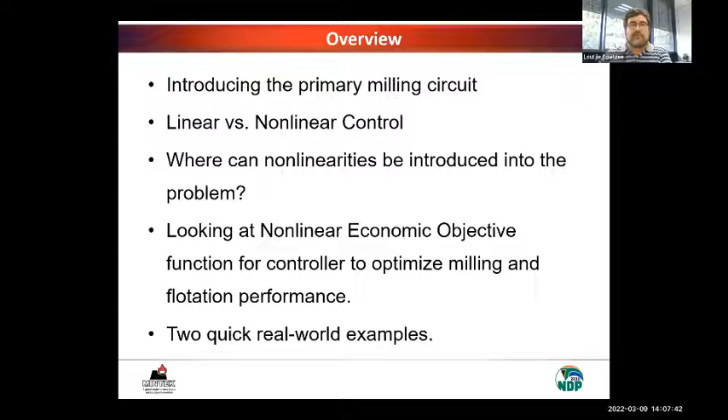Okay, so for this talk, I'm going to be focusing on a primary milling circuit. This is a typical circuit in PGMs, in this case a Merensky ore that's being processed by a primary mill that uses hydrocyclones as its classification. It then goes into a surge tank or a conditioning tank before it feeds into the flotation circuit. So for this case study, or for this example, I'm going to be looking at what can we do with this specific milling circuit in order to improve the feed to the flotation, having therefore better flotation performance.

So just quickly, I'm going to run through the circuit. So we assume we have a silo with 2 feeders that feed into a conveyor belt, a weightometer that measures the feed rate into the mill. On the mill, we have the mass or the load, and we have the power as a measurement. It discharges into a discharge sump. We can add some water. We measure the level. We have the pump, and we can actually measure the density, the flow rate, and the pressure going to the hydrocyclones. In this case, I'm also assuming the hydrocyclones is a cluster of 8 cyclones, which can be switched online. The underflow goes back into the mill, overflow goes to the conditioning tank.

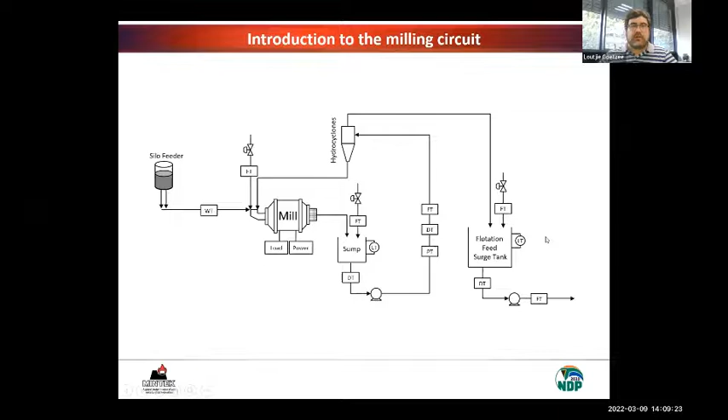When we talk about models, typically in the model predictive case, we usually refer to dynamic semi-empirical models or even purely empirical models. So what that means is that we will do perturbations, make changes to the plant, step a valve, step a pump, step the feed rate, and see how the process responds. Then we will fit some sort of mathematical representation or model to capture those dynamics.

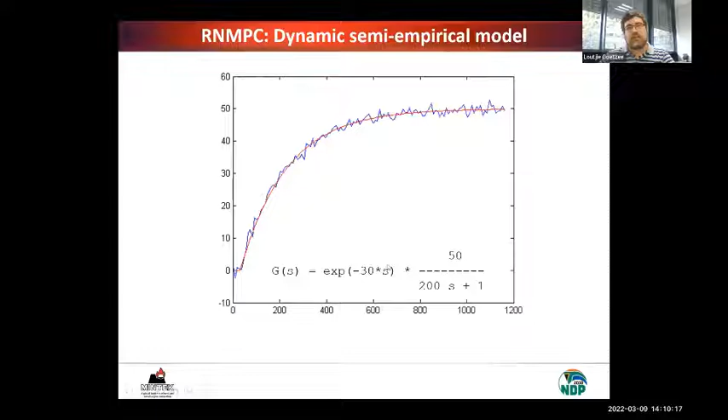So in this case, once we made a step change, we can see that the control variable has increased and then settles out at some steady state value. There's some dead time at the beginning, and there's some transition time or dynamics happening here. We can represent it in this format as a semi-empirical model.

So we can do this modeling either by hand, or we can use some automated tools. If the problem gets bigger, it becomes more efficient to use automated tools that then does the perturbation for you, so you don't need to pay an engineer to sit at the plant and step up, step down, and look at all the variables. The automated system can do that, giving you results in a short amount of time and also with less cost.

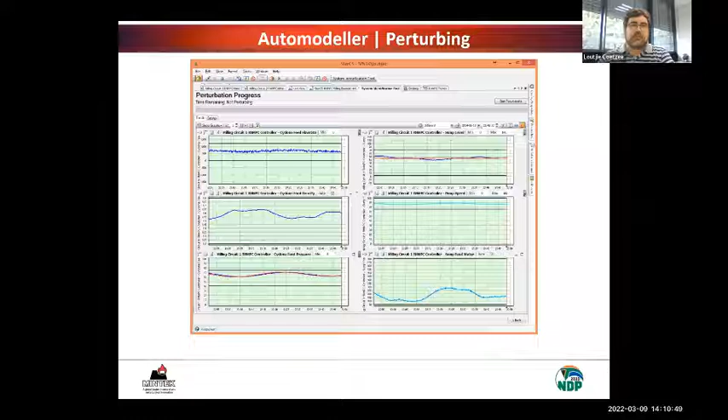Once you get this data, we can look at it in the frequency domain and see what variables responded. In this case, we perturbed the sump level set point. We can see that the sump level actually responded as we would have expected. We can see that the cyclone feed density actually responded, but there was no response on the rougher density, surge tank level.

The power draw of the mill, again, as we would have expected. We can see nothing on the solids feed rate. We can see the water addition changed. Discharge pump didn't change, rougher feed flow rate didn't change. Also the water addition to the surge tank didn't change.

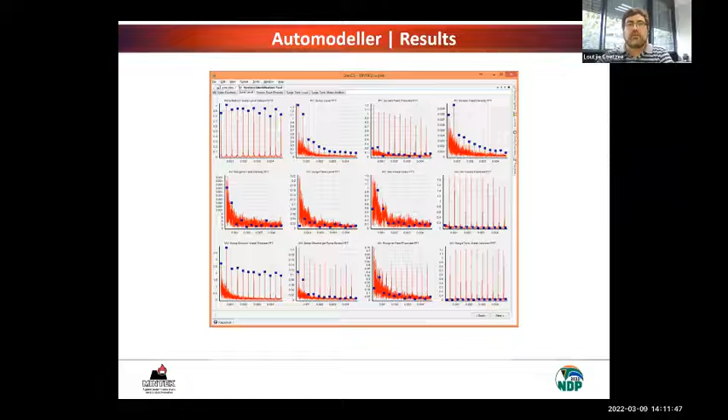So we can get a lot of information about how the process responds to certain perturbations that are made, and we can draw some conclusions about what variables interact with each other and what variables are independent of each other.

And when we're done with this exercise, we will get to a matrix of models that will say, okay, if we change the solids feed into the mill, the volume of the mill will change with this dynamic. We'll get the mill discharge, or the cyclone feed density will change using this dynamic.

Similarly, if we look at the water addition, the sump level will change. We will get, again, the density changing with this dynamic, and we'll even see the rougher feed density changing with this dynamic.

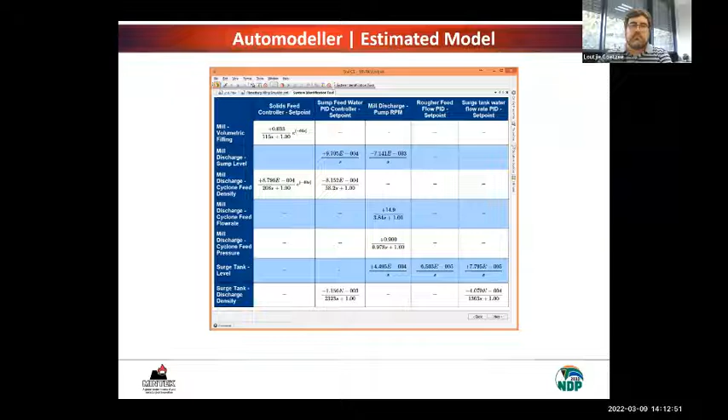And so we can go through all the manipulated variables versus controlled variables and see what is the interaction between them, what is the correspondence, and how the dynamics look. We will use our process knowledge in this case to evaluate: does this make sense, is the direction correct, is the model structure correct, is the type of dynamics what we expect.

Once we have that, we can then configure our model predictive controller to do regulatory control. Basically, what we mean by that is we control to some predefined set points, operating points that the operators want us to control. In this case, I'm just going to run this video.

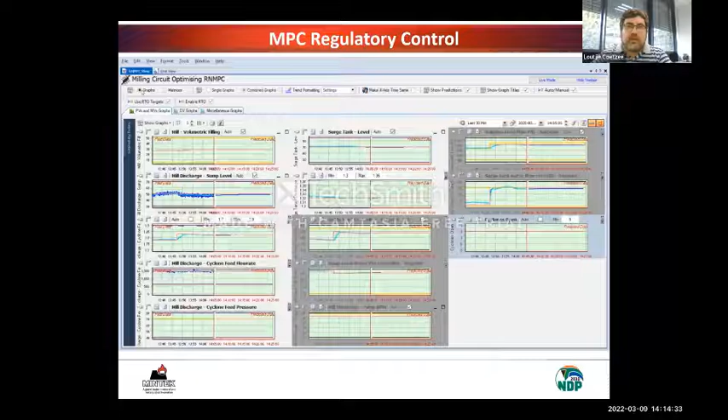In this case, we might want to just change the density on the cyclone side, but it's not just the density that's changing when we change the water, the volume is also changing. So what we've done is we've changed the density target for the flotation from 1.32 to 1.35. It's saying, okay, I need to reduce water, but as I reduce water, the volume needs to drop. And because the volume is dropping, the pressure also wants to drop, but we actually want to keep the pressure up for good classification. So it's actually closing a cyclone in the process in order to keep the pressure close to its upper limit.

And all of these changes, we can see almost all the manipulated variables are changing at the same time. It is doing that so that it can reject the effect on sump level, so there's minimal effect on sump level. It's trying to minimize the impact on flow to the roughers.

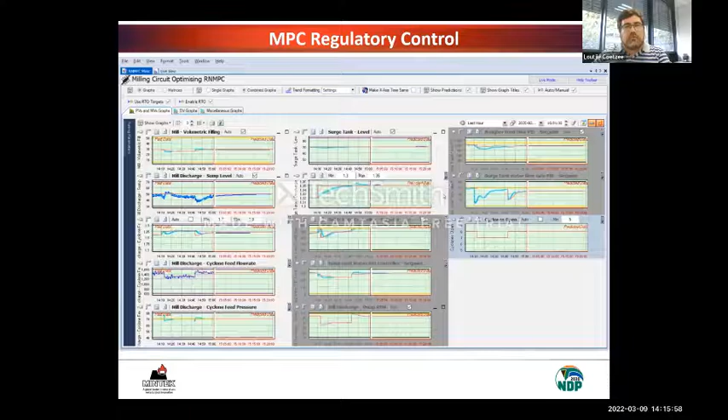And in this case, there's actually some optimization in there as well. It's trying to say, okay, while keeping this density at target, can I maximize the tonnage through the mill so that I can get some optimum economic performance?

So I'll start speaking about optimization now, but I hope that this demonstration gives you an idea of the regulatory control, multivariable regulatory control capability that MPC brings. So there's a few benefits. It can deal with the interactions.

As I said, if we change water for density, there's also a volumetric effect. If I change the feed rate to the mill, there's density and volume effects downstream that needs to be handled.

Also, it's one of the few control strategies that can actually deal with constraints on the control variables. So if I know that I have a volume limit downstream, because my flotation can only handle a certain volume due to residence time reasons, then it can back calculate from that constraint all the way to what is the optimum feed rate that will not exceed that constraint. So that is the benefit.

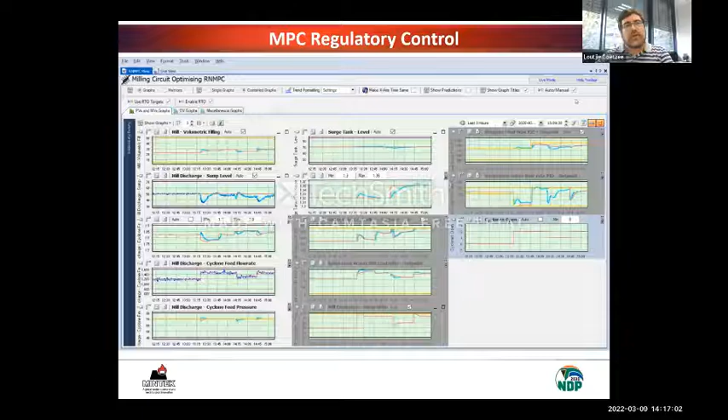So it can handle these interactions, it can handle constraints. It is predictive, so it knows any change that is going to make the process, how is that going to affect the process. Okay, so let's move on.

So as I said, we get these models, and in our case, the models are translated into ordinary differential equations, because it also has to make provision for nonlinearity or nonlinear models to be represented.

And we use state space representation. So we have the states, and the states can be real or it can be just a mathematical construct. So if it's real, it might be something like the sump level that's being represented by a state. And the state is where the dynamics are happening.

So we can say the sump level is increasing. The rate of increase in the sump level is being described by the mathematics on the right-hand side of the equation that will say, okay, this is how the rate of change will happen because of the pump speed, because of the water addition into the sump. And then the controller will know, okay, if I balance the pump speed, the flow out of the sump versus the flow into the sump, then I will get to a steady state sump level as an example.

So it looks at this whole model, it derives all of its interactions for different variables from this and uses it in its prediction in order to calculate the optimum control moves it needs to implement on the plant.

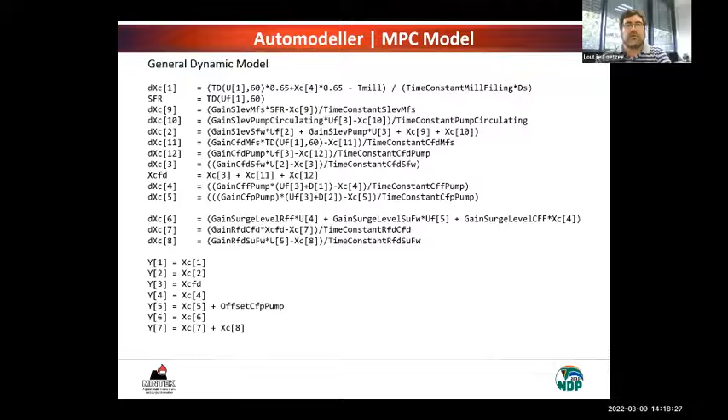Okay, so linear control, this is actually more a statement, is suitable for most control problems. And the reason is that we typically operate around a fixed operating point. And if you look at that behavior, if I'm operating around a fixed operating point or in a small operating region, then the models can typically be linearized and still give a very good approximation of the dynamics of the behavior of the plant.

Non-linear control is more common in batch processes because there we start at one operating point and we want to move the process to a completely different point, and it might go through different behaviors as we move the process from one state to another. But also we can see that non-linear control can start to have an impact when we're doing optimization.

So in this case, we say we can add nonlinearities, and that can be due to having phenomenological models or first principle model components in our models that can describe the changes in steady state as we move from one operating point to another more accurately, with just some parameters that needs to be fitted to a specific plant.

So we will only add it where it makes sense, and I will give some examples of where it might make sense in the milling context. It is useful for lights out control and whole process optimization, propagating backwards where the process has to operate over a large operating range. So what I'm describing here is Industry 4.0.

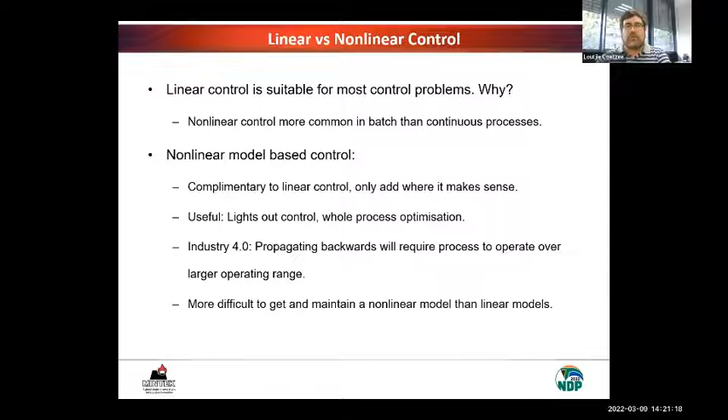But it is a lot more difficult to get and to maintain nonlinear models than linear ones. So in most practical cases, even in our case, we use linear control for regulatory control. And we're only really investigating nonlinear approaches for optimization where it makes sense.

So if we go back to our milling circuit, where are the typical nonlinearities that are present? The first one is the mill. The mill has some nonlinear steady state behavior depending on the volumetric filling. So if I fill up the mill, if it's on the underloaded side, it will behave in a certain way. If it's on the overloaded side, it will behave differently in steady state. And I'll explain that a bit more.

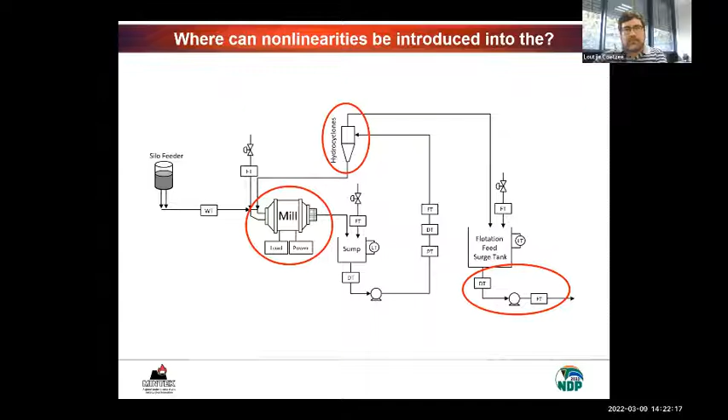The hydrocyclones are also a point of, especially if it's a cluster, nonlinearities, specifically discontinuities that are present in the model. And then if we're looking at the interface between milling and flotation, if we want to reduce the flotation problem down to a simple metric, that is also quite a nonlinear process in itself. I'll explain each of these three points in the next few slides.

So if we just look at the volumetric filling, or as a proxy, the mass of the mill compared to the throughput, there's a well-known throughput curve that we can get. Here's an example of how we can linearize it. So if we limit the application of the model between 15 and 30% volumetric filling, we can easily approximate this parabola as a linear line, so basically a linear model with a fixed gain.

If we want to widen the limits, however, we start to get changing behavior, where on this side, if I increase the volumetric filling, the throughput goes up. If I'm in the middle, there's almost no change. And if I go to the overloaded side, if I increase the volumetric filling, the throughput actually goes down. So if I'm still applying a linear model on this side that says increasing volumetric filling will increase the feed rate, and the feed rate starts to drop off, it will say, oh, okay, I must just push up the volumetric filling some more, worsening the problem because it's not aware that there's a change in the steady state behavior happening here.

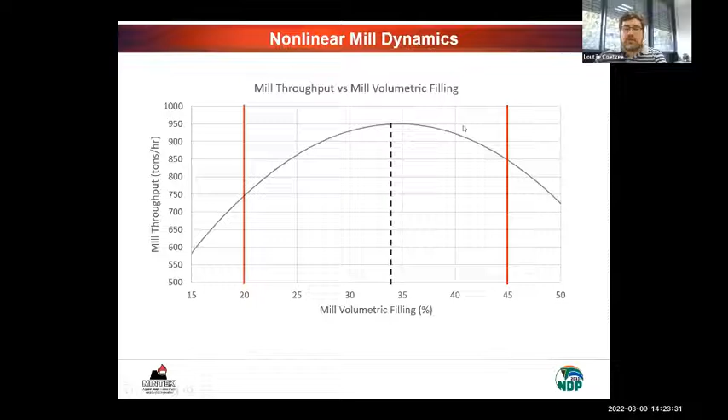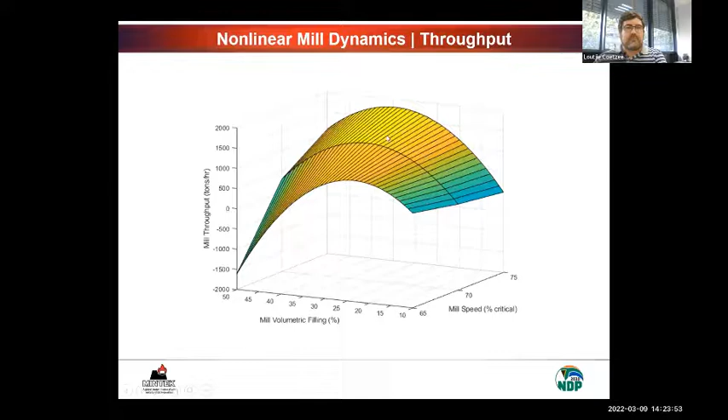There's even more when we look at densities or rheology, if we look at ball loading, that starts to play a role in terms of the mill behavior. And also, if we look at the speed, it's the impact position of the toe that can also play a role. So if you're undershooting or overshooting that toe position, it can have a drastic change in behavior, increased liner wear, increased ball wear, but also reduction in throughput. So there's a lot of factors that can just be described around the mill alone in terms of steady state behavior.

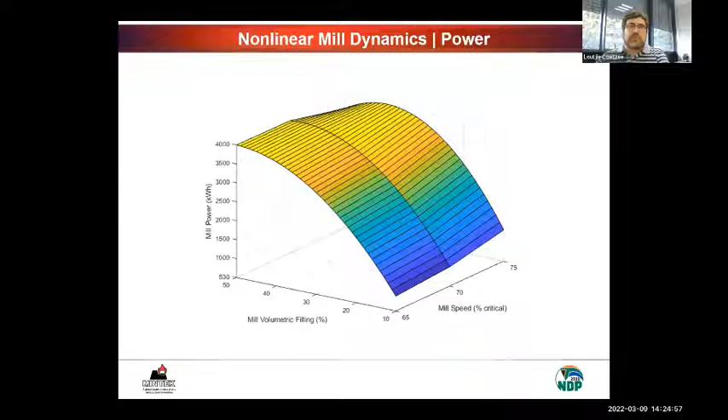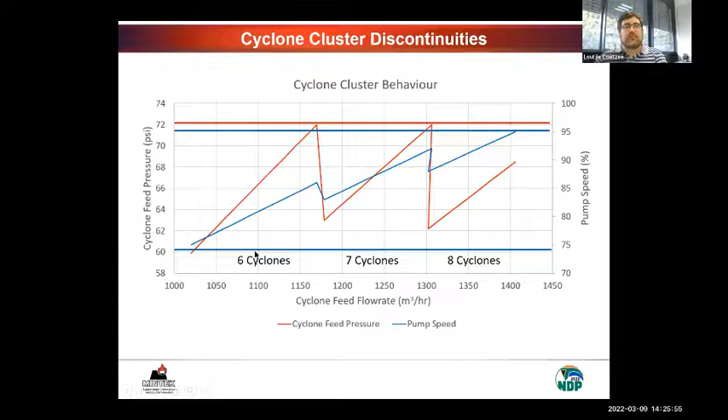So these discontinuities are also a form of nonlinear behavior. And what's also present in this case is discrete numbers - we can't have 6.2 cyclones or 6.3 cyclones open. So we can't do continuous control, it's either 6 or 7 as a discrete number.

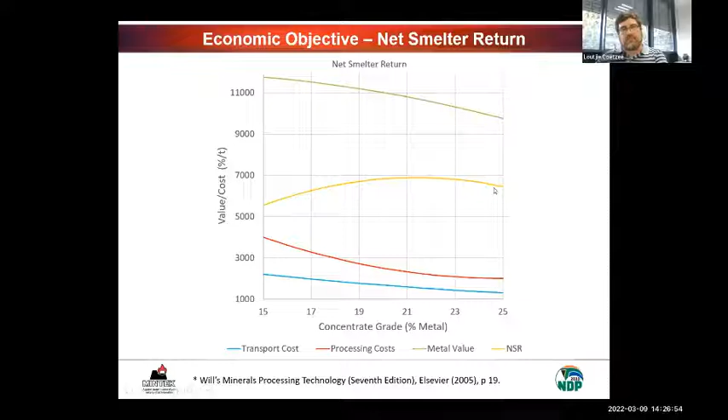Then if we start looking at the net smelter return, we can look at the transport cost for transporting the concentrate grade to the smelters. We have the processing cost - how much it costs to get a certain concentrate grade of metal. So we can look at what is the metal value - as the grade goes up, the metal value goes down because we have less recovery. If we combine these three curves together, we get the net smelter return, and we can see there's some optimum concentrate grade that gives the best value per cost in terms of metal. That is our ultimate economic objective for a concentrator - milling and flotation - to optimize this net smelter value.

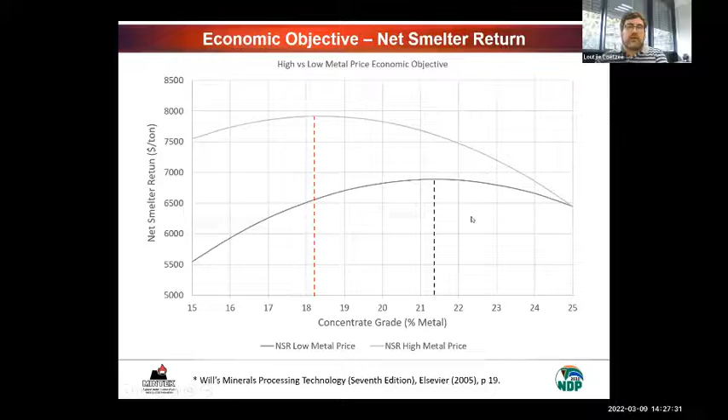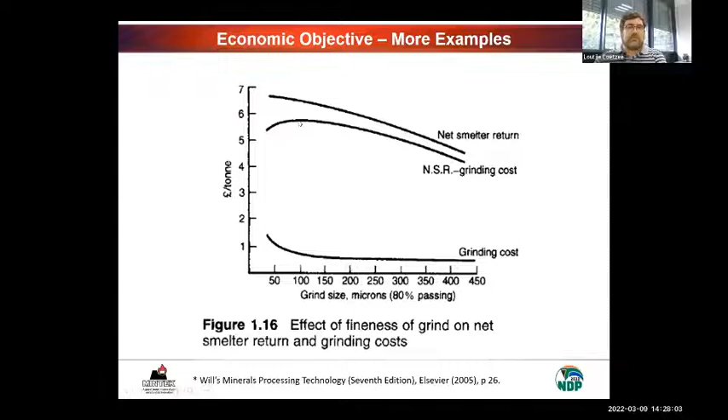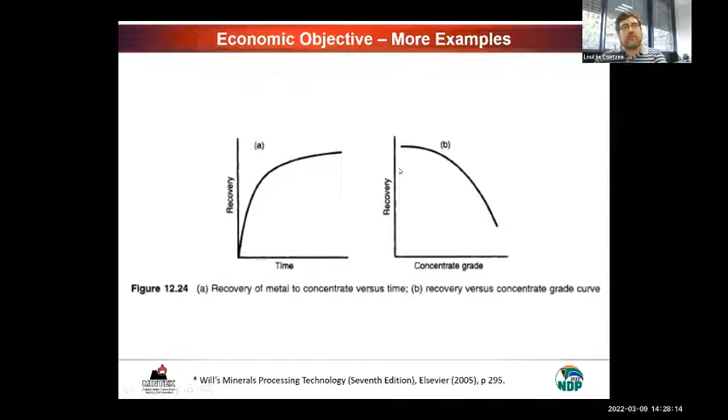Then we also have recovery of metal to concentrate versus time, and the recovery versus concentrate grade curves on the flotation side, all being nonlinear curves. We have the particle size to rate constant, the cumulative grade in rougher flotation versus time. So the grade - the longer we're floating, the higher the residence time, the lower the grade, because we're starting to recover again. So all of these things show nonlinearity.

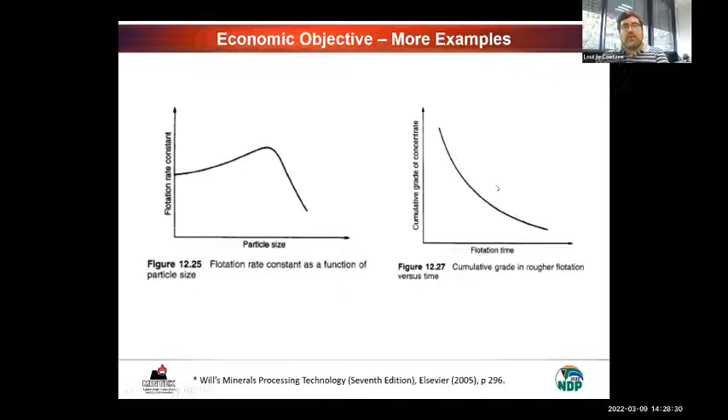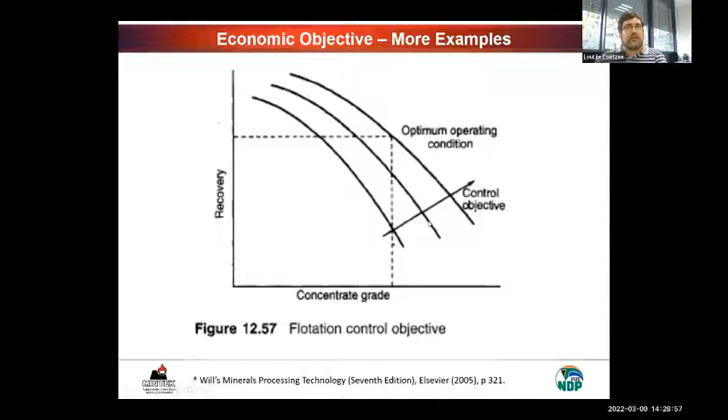So what we're trying to do is, can we move the recovery and grade curve up using control? So not just stick on one grade-recovery curve, but can we actually move this curve in an optimal direction - getting a good grade but at a better recovery, or maintaining a certain recovery at a better grade. That is the ideal we want to achieve.

So for this simulation, I've drawn up a very simple model of the flotation circuit, where the two input variables going to the flotation are the flow rate and the density. I haven't even included grind. That maps to some sort of concentrate grade on the flotation. At the moment, I'm not looking at doing any control on the flotation - I assume that the control in there, if I can get the density and flow at a certain point, I will get a certain grade from my flotation.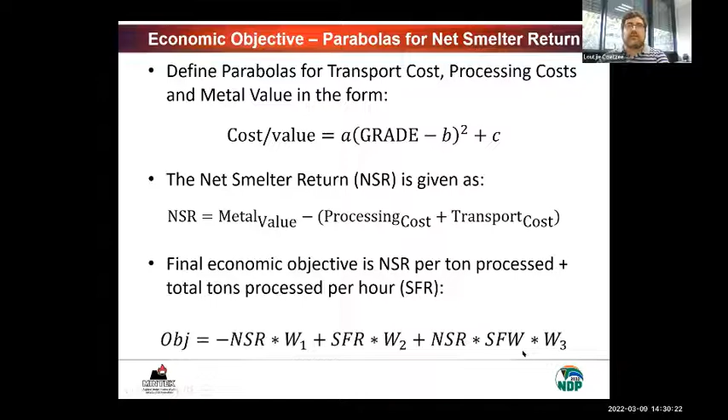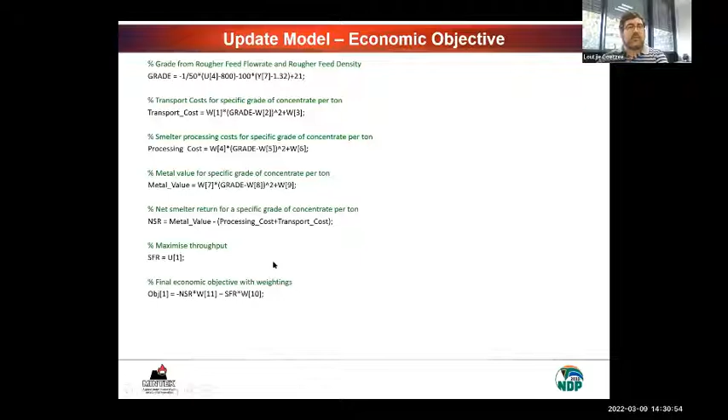So looking at these three, this is some of the nonlinear models I've added - I won't spend much time on this. This is how the objective function has been defined inside the controller. We have the grade, transport cost, processing cost, metal value, net smelter return, solid feed rate - I haven't updated it for the combined net smelter return solid feed rate here. But that we describe explicitly in the controller, and say, optimize economics depending on which of these objective functions I activate.

So I'll get to those results in a moment.

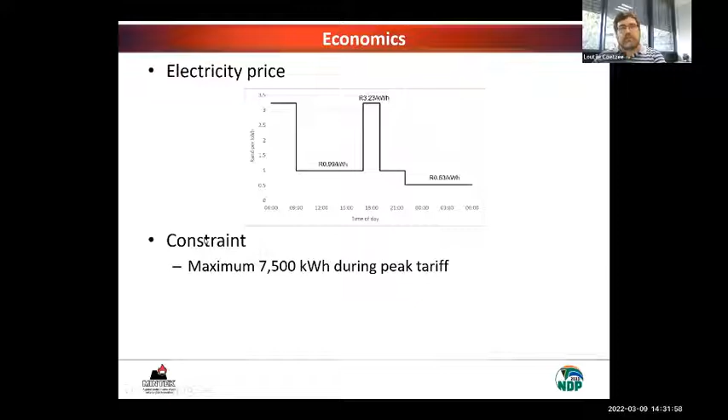Another thing that can start to play a role - I don't think we're there yet, but as electricity prices keep going up, we also get the time of day value for electricity. So we get the normal time rate, the peak times rate, and the off-peak time rates. At some point, they might actually start to affect the economics of the grinding circuit, where it might be more optimum to move the operating point of the milling circuit to respond to these time of day electricity charges. There might also be some peak energy demand placed on the milling circuit from Eskom in these peak hours that you also have to adhere to. So the controllers can take this into account in terms of the electricity price we know up front, and also the constraints of electricity available to the milling circuit.

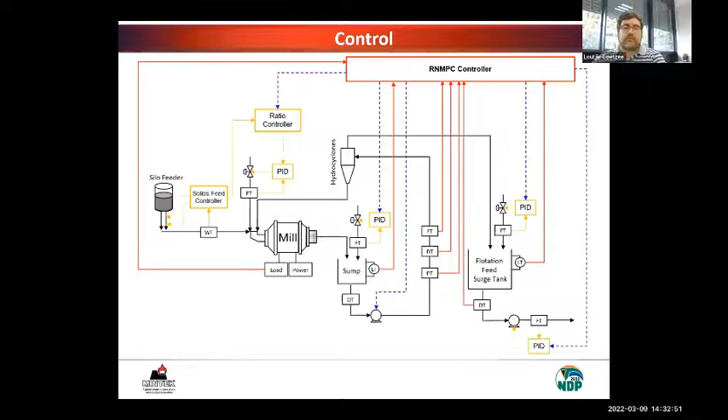So we'll define one controller that looks at this whole milling circuit in one go, understanding all the interactions and the economics as we've described, and we can say control, regulate it, and calculate where to regulate it to. What is the right density? What is the right flow rate? What is the right mill volume? What is the right feed rate to the mill that will give us the best economic benefit? So we're no longer dependent on the metallurgist or the operator to define those values on a daily basis. The controller, using all the sensors available to it, as well as the economic objective, can calculate that in real time as things change.

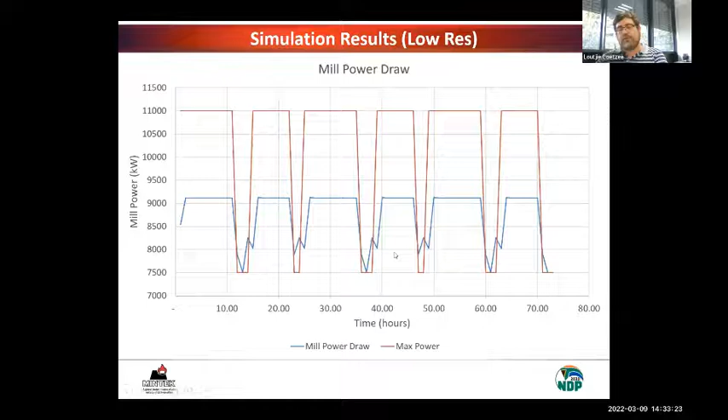So what we can see in this graph is if we activate the limit, say the peak times on the milling circuit, where we say you can use 11 megawatts most of the time, but during peak time you're limited to 7.5 megawatts, we can see the real power draw of the mill dropping and then recovering, dropping and recovering, as it adheres to this limit, changing the operating point of the mill to achieve this.

So again, the solids feed rate - because we're dropping the power, we might have to drop the feed rate, and because of the feed rate it will have density and flow implications. So it also needs to take that into account to find out what is the most economic point to operate here, during both this and the other tariff times of the milling circuit.

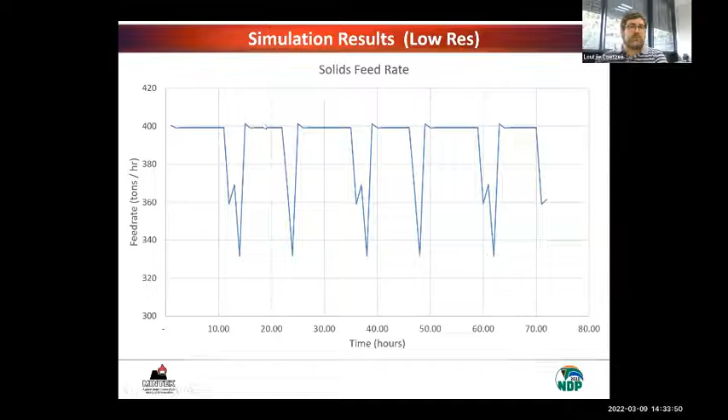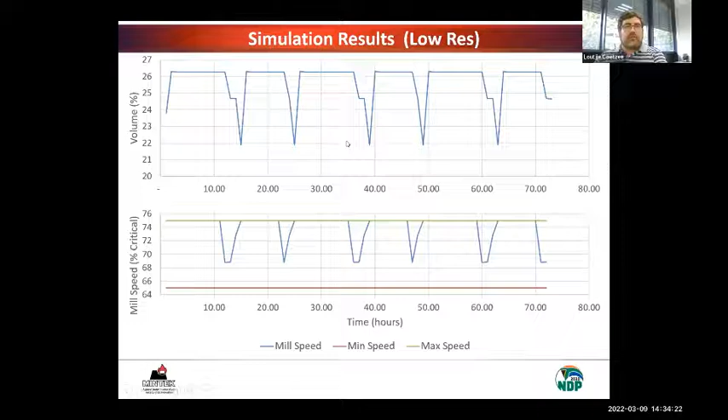So cyclone feed flow rate, mill speed - we can see how it's doing that reduction in power. It's slowing down the mill during the peak periods and then speeding it up to get that reduction in power in the mill. It's also changing the volume of the mill to compensate for the lower speed, still giving enough volume to get the grinding we need. It knows that if it changes the speed, that has an impact on the volume which will affect the grind, so it makes provision for that.

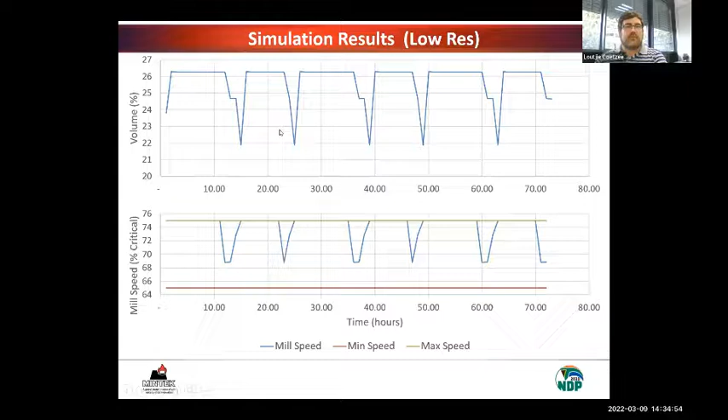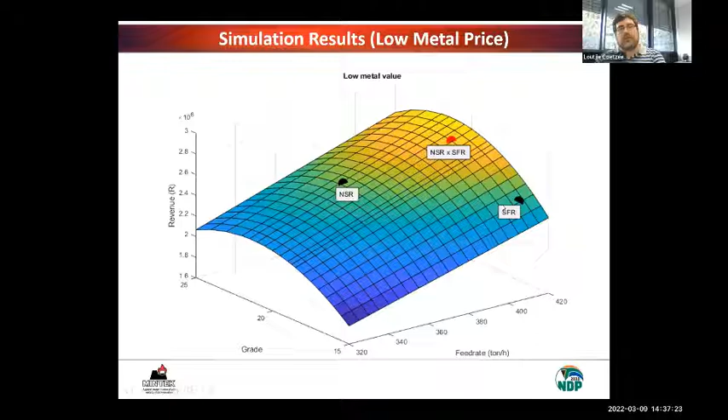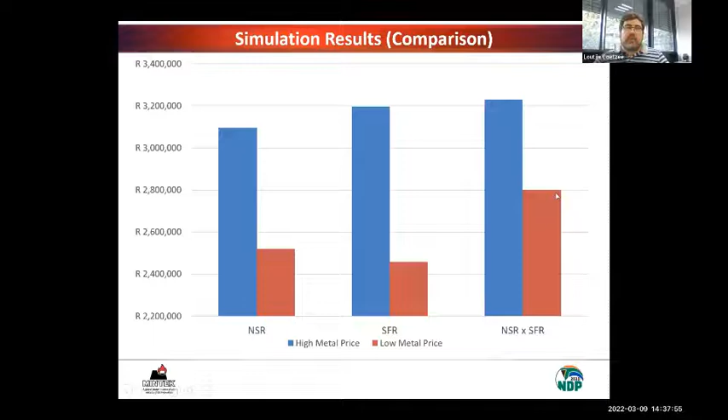Okay, so you can say, but this is all simulations. So does this really apply to the real world or real milling circuits? And I'm just going to show two case studies. I've hidden the values just to anonymize the client and the values.

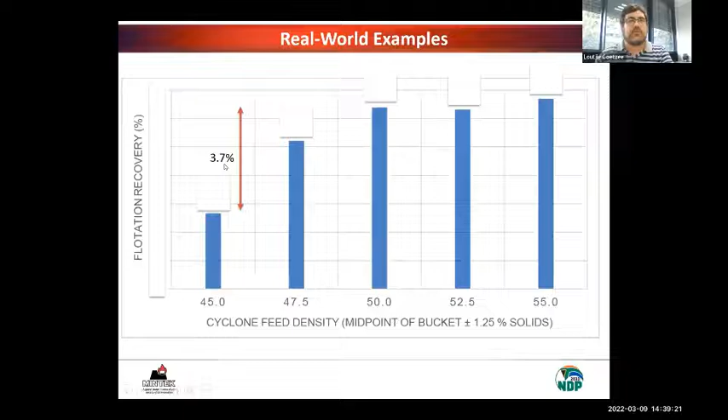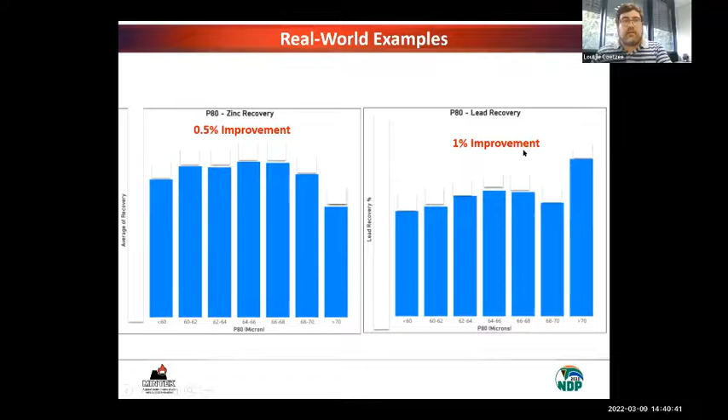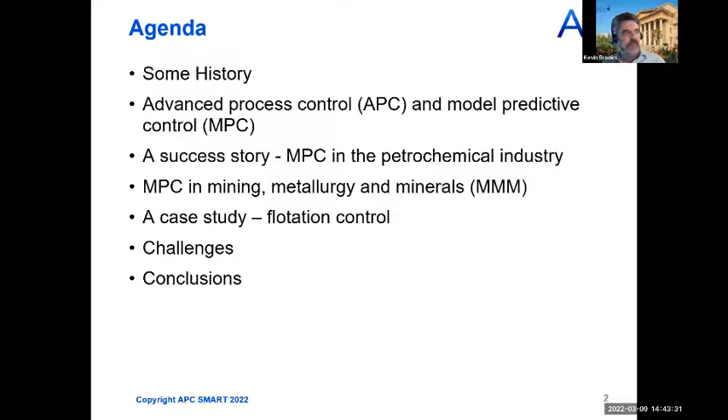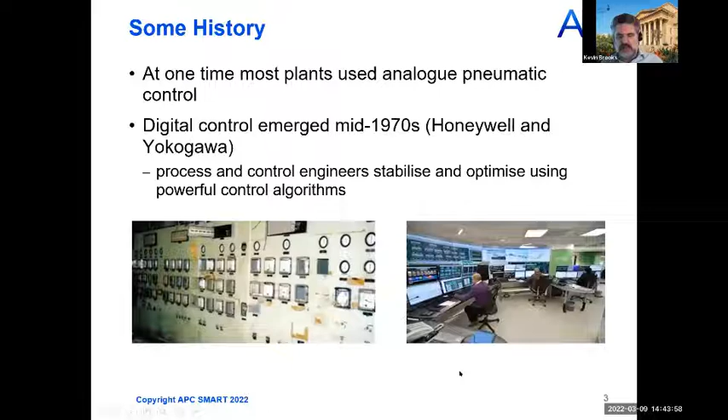Very quickly, why can we do what we do now? It's because of the advent of digital control in the mid-70s. Before that, we had pneumatics. They worked very well, and some very clever things were done, but the kind of things Loutjie's just talked about, even 15 years ago, were difficult to do. So it's digital control that's allowed us now to apply these algorithms.

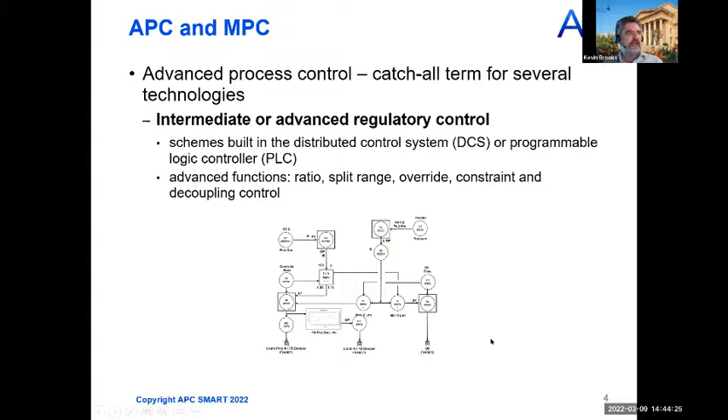What do we mean by APC? APC is many things to many people, but I include in it intermediate regulatory controls, which can be things you build in a DCS typically, or a PLC. This, for instance, is the cross-limiting burner controls for a boiler. A lot of you may have met fuzzy logic - if you've got a Samsung washing machine, you apparently have met fuzzy logic, which is one way of doing a sort of rule-based control, and is quite popular. There are many companies supplying that.

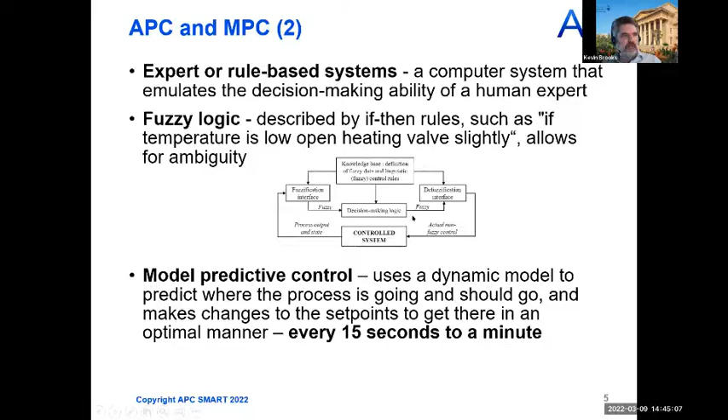But as Loki's eloquently said, model predictive control gives us the multivariable element and the predictive element, and includes optimization as a mathematically rigorous function - whether it be linear or nonlinear doesn't matter, the point is it's built in. I think experience has shown that trying to do that in fuzzy and rules-based systems is tricky.

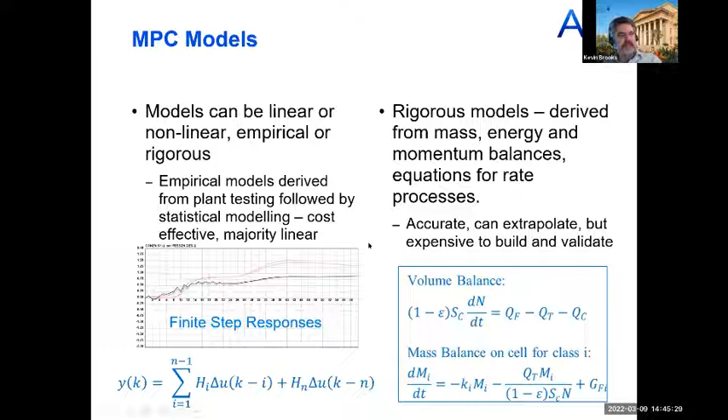Loki too has talked about the models. I'm not going to go over this at all - we have empirical models, non-empirical models, linear and nonlinear. That's up to you. I've largely worked in linear empirical modeling, and that's what I'm going to talk about today.

My real point about all of what we do - and again, Loki's talked about this - is that we have a rigorous objective function that we're optimizing, either at steady state, like this one, or along the trajectory. That's also an optimization problem.

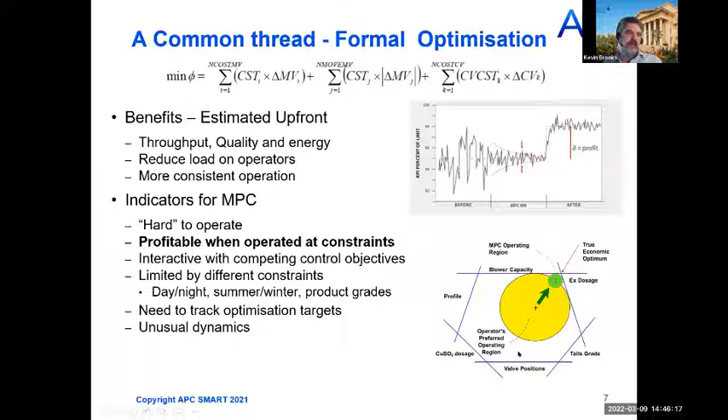With MPC, we can estimate benefits upfront based on improving the control and then optimizing, and we can operate at constraints, which operators typically stay away from. In this particular picture, the constraints are linear, and then you have to operate at a vertex.

Where does it all come from? Well, it comes from our colleagues in oil refining, largely. DMC, the very popular algorithm, was developed by a guy called Charlie Cutler, who was with Shell, as was SMOC, developed by Pascal Marquis, who was also at Shell - he was in Europe, Charlie was in America. And then the Honeywell tool was also developed from a variety of packages.

These kind of tools are now standard in oil refining and petrochemicals. As far back as 2003, Qin and Badgwell did a survey that listed 3,000 applications in refining. So it's a successful technology.

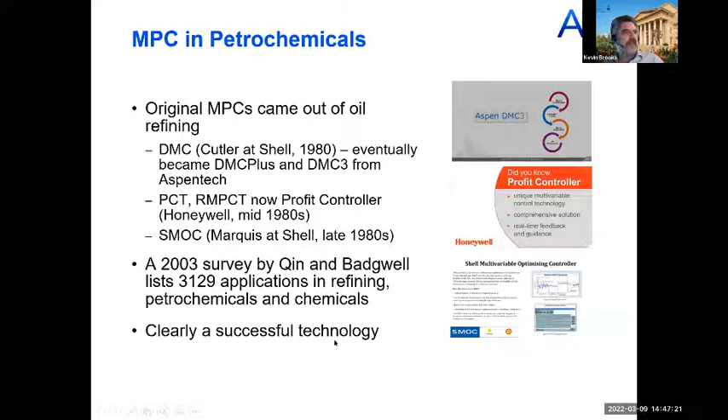They also listed some other industries. I've put some of them, but the one that stands out is that for us there were 37, about 1%-ish of what there were in oil refining.

And we have to ask ourselves why, even in 2003, had this successful technology not infiltrated into the field we work in? Some points that I'm not saying these necessarily are the case, but they could be.

Mining companies are slow adopters of new technologies, and there used to be a resistance to the use of modeling as a tool. There's a belief that complicated solutions get switched off, and that other kinds of technology might be more suitable, at admittedly reasonably high initial cost, even though there's acknowledgement that the returns on investment are very fast, almost always less than 6 months.

And then one thing I've become more and more interested in, which is that the measurements aren't available and the sensors are noisy.

There's a couple of ways you can address this. You can invent new sensors, and I think we know of companies doing that. A lot of image analysis techniques are being used now very successfully.

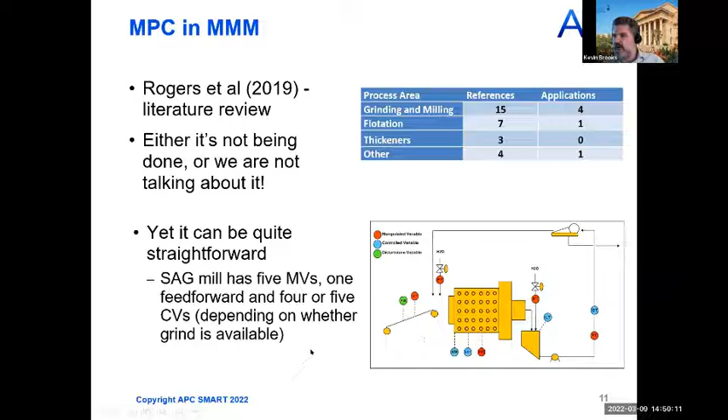Okay, so some areas where in the triple M field MPC has been used, either where I know it, I did it myself, or I know other people have done it. I'm not going to go over them all, but we've talked about milling.

I'm going to talk about flotation. I've done thickeners. Electrowinning is a field that can be used. I know of a jig plant application. I'm particularly interested in solvent extraction. Given the hydrometallurgical routes that people are developing now, this is going to become more important. So I think not only can we do it, in some cases we already know how to do it.

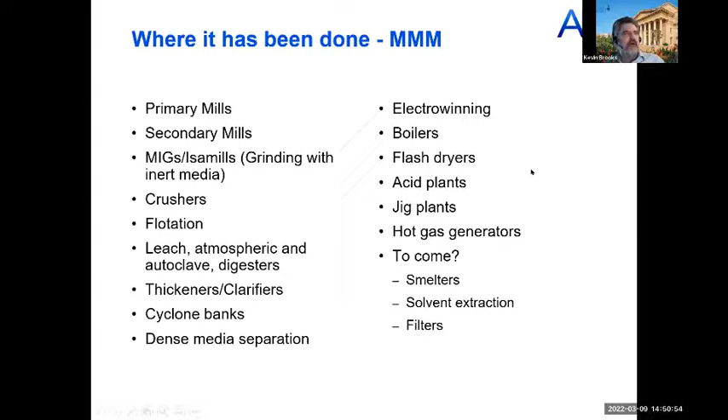So the case study I'm going to give you is from the other side of the world. Mount Isa is a plant we worked in, and all the results I'm showing you have been published. There's nothing secret. We worked on the lead and zinc side; there is a copper plant there as well. It's not close to anywhere, in the middle of the outback. But for a process control engineer, an interesting place to work.

When it was Xstrata, now it's a Glencore operation, but when it was Xstrata, and subsequently, they've done a lot of work developing new processes. So things you might know, like the Isa mill and the Isa smelt, were developed there. And they've done a lot of work commercializing, especially Glencore, the Jameson cell.

So the flotation plant I'm going to look at, well part of it, is a fairly complex one. It's a lead zinc operation. They float the lead, then they float the zinc. And there are lots of cells and lots of banks and lots of cyclones and lots of mills.

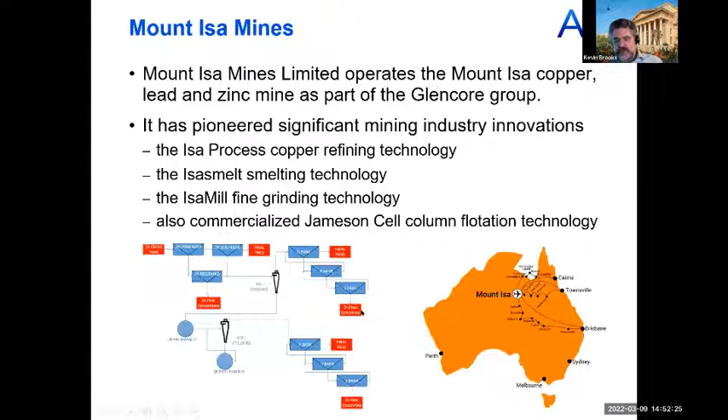So this was a very interesting project. I'm going to just limit myself to talking about 2 cells because it makes sense. We didn't only do 2 cells, but the real advantage we had there was that the compositions are measured online using XRF, X-ray fluorescence analyzers. These are sampled analyzers, or sampled systems, so one XRF is measuring more than one stream using sampling, and that has its own challenges. But it does mean that you've got measurements where typically you would normally only have assays from a lab.

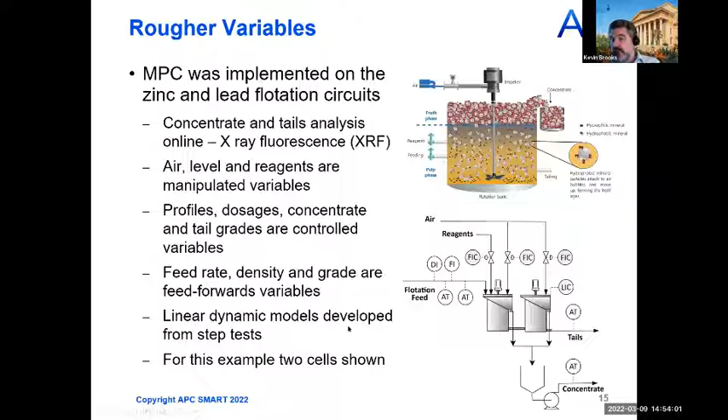So if we then do the kind of analysis that Loutjie did as well for the grinding circuit, what are the inputs, what are the outputs, we find that we can manipulate air level and reagents. We've got the air coming into the two cells, reagents typically at the front, and then the level, in this case one level for two cells. We want to control the profiles of air and level, but in particular we want to control the compositions in the tails and the concentrate. And we've got disturbances to the system, like the feed rate, density, and the compositions of the feed. In this case we developed linear dynamic models, purely empirical, as Loutjie mentioned, using automated step test techniques.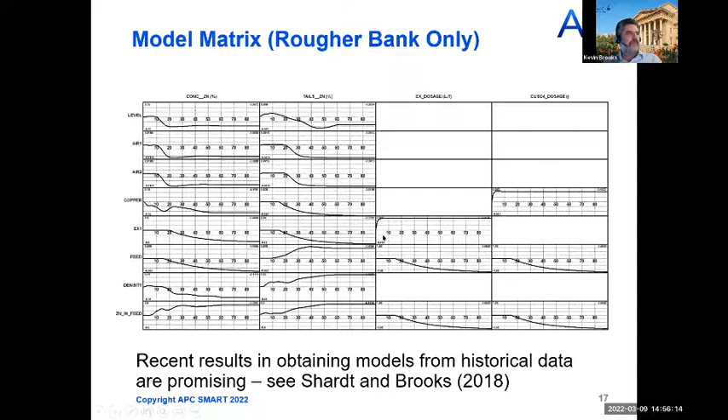The control objectives - yes, it would be great to include the kind of things Loutjie was talking about on the mill. In this case we hadn't yet done the mill, so we didn't include that. We had fairly simple objectives, which were to maximize recovery and minimize reagent dosing. These are all subject to the other constraints on the system, so maximize recovery doesn't mean the grade of the concentrate can be anything at all - there will be a low limit set on that. So you end up with the constraint problem with the vertices that I showed in the previous picture.

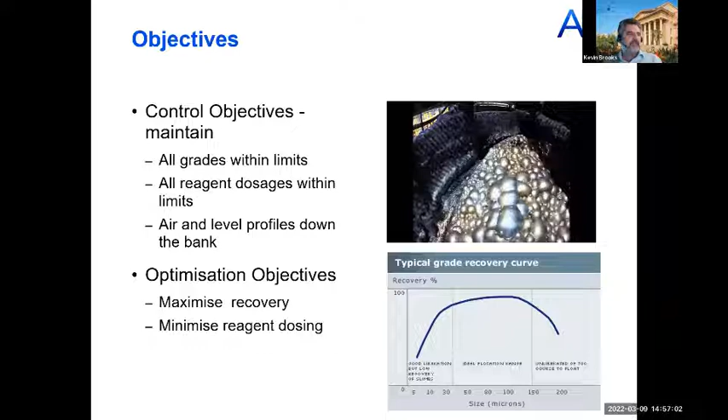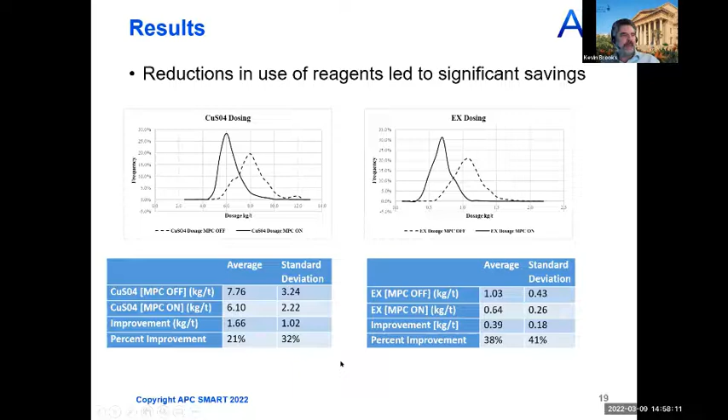What do I see as the remaining challenges in the field, apart from getting you guys to do it? We have to look at the instrumentation and the soft sensors. We have to be fussy - why shouldn't we have as good measures as they have in oil refineries and spaceships?

I completely agree that there are some cases where nonlinear responses have to be taken into account. In fact, I have a student, and I believe she's on the call today, doing work on the nonlinear response of the system to reagents.

We have to look at the fact that the churn in operators and engineers is very high, so we have to find a way of making our applications self-sustainable. And this isn't just in model predictive control - I think this is in all the software that it's become very popular to apply digital whatevers, but you have to be very careful that these applications are sustainable. Okay.

Proving benefits is a bit tough because, as Loutjie said, these are small recovery benefits that are worth a lot of money. But how do you prove that you got a small benefit? There's always going to be someone who says, well, I built this, or I did that, or I changed this procedure.

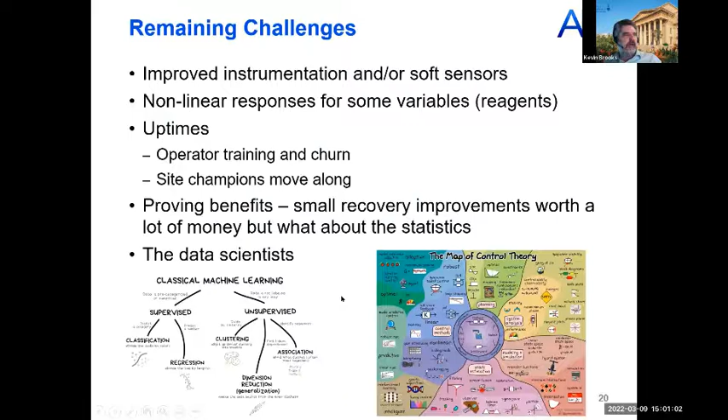If you're interested in control, this map is available for download from the internet, and it's very interesting. We work in a small little area over here somewhere. I've shot through it because I wanted to leave time for questions. If you have any questions, please feel free to get hold of me, and I'm sure Loutjie will say the same.

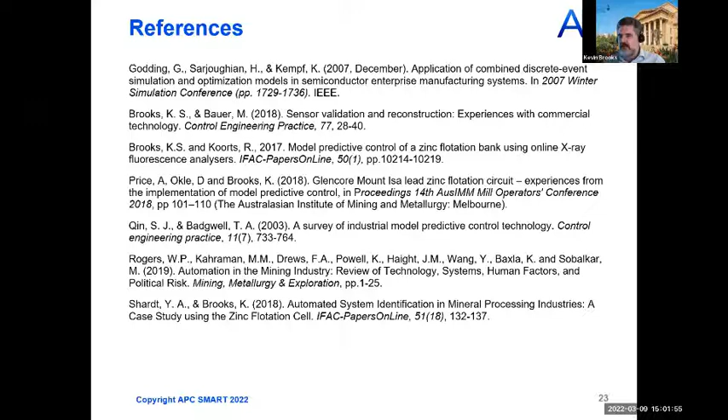Many thanks, Kevin, and many thanks, Loutjie. Both presentations were incredibly interesting, and it's always good to see concrete examples of things being applied and showing great improvements. We currently don't have any open questions. I see a comment from Roy Irvin in the chat saying it's an excellent presentation of how mines should be optimizing their milling circuits as economic and market conditions change. I think that's something everyone can agree with, that it should be something everyone is looking at. So if anyone has any questions, please post them in the question and answers tab, because currently we don't have any, which might mean it was just an incredibly well done presentation.

I might actually just ask a quick question in terms of what is the limit of the types of optimization that you could look at in an MPC? Could you look at things like water utilization and environmental emissions as something you might want to optimize for as well?

Yeah, so to answer that, no, there's not really any limits. Anything that you can measure, you can include. I think the challenge becomes that these optimizations are maybe competitive. So say if you want to push production, it might come at the cost of environmental emissions. So you will get some sort of trade-off between the different objectives that you're trying to control, and that needs to be carefully understood when you're designing the economic objective.

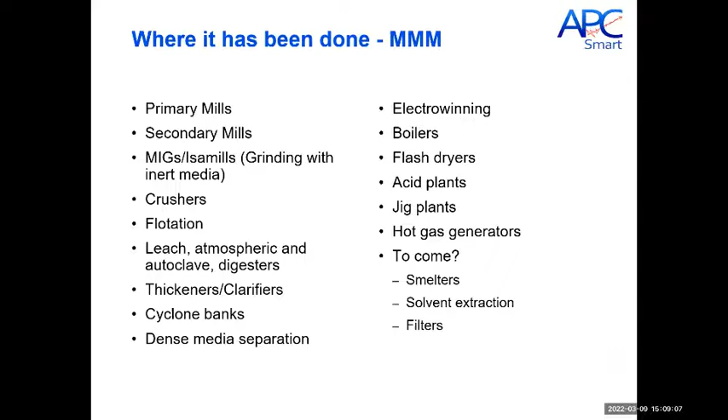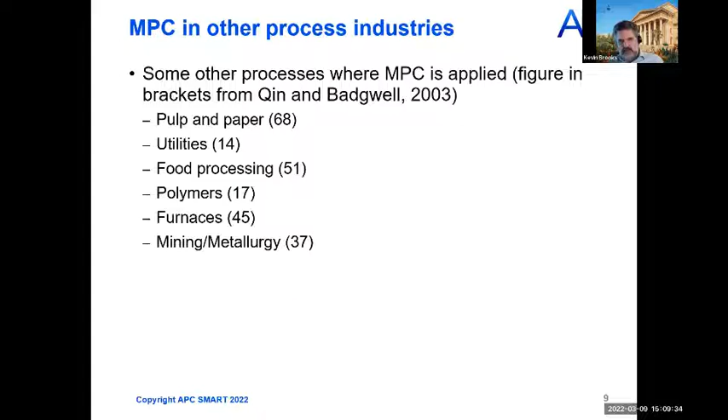Okay, the next question is from Keith, who asks Kevin, you mentioned in 2003 that the adoption of advanced process control, or MPC, in the mining field was about 1%. What is your current assessment of where the current situation is? I'd be very surprised if it's grown to more than 10%. I still think we haven't infiltrated the market as much as MPC has infiltrated the market in oil refining and petrochemicals. I still think these points I made, if not all of them but some of them, are hindering the uptake of the technology.

Okay, I think the next one is a more general question, so either of you can answer - it's Robert who asks, what do you guys see as the future developments in the field of MPC and NMPC? Sorry, MPC and what was the second part? NMPC. Okay, I'll take my first stab.

I think one of the areas coming up, or what we're looking at least, is combination of machine learning type things, neural nets or Bayesian optimization, with MPC - combining those two fields to get the best of both worlds. For me, MPC models are very well understood - you know exactly what the controller is going to be doing under which conditions. So if you're putting MPC with linear models as regulatory control, there's no unknowns in terms of what it's going to do, whereas machine learning models are not always as transparent - you don't always know where it's going to move. But at an optimization layer with MPC, keeping it bounded in a safe area, interesting things can start to happen. So the combination of the two, especially since non-linear models are difficult to get and maintain - if you have self-learning non-linear models in your machine learning and use that in your optimization in a safe way, that can be quite an interesting field going forward.

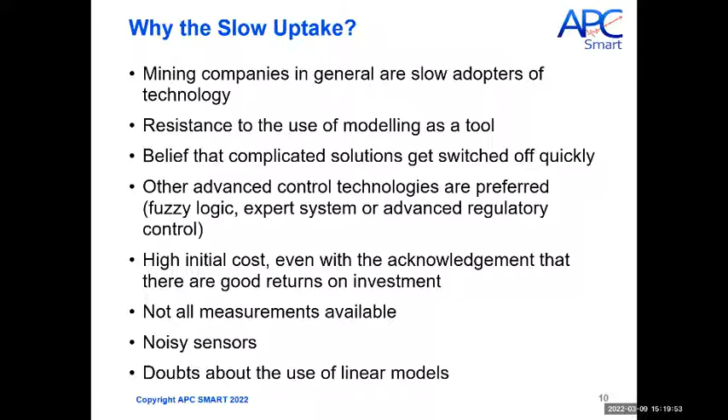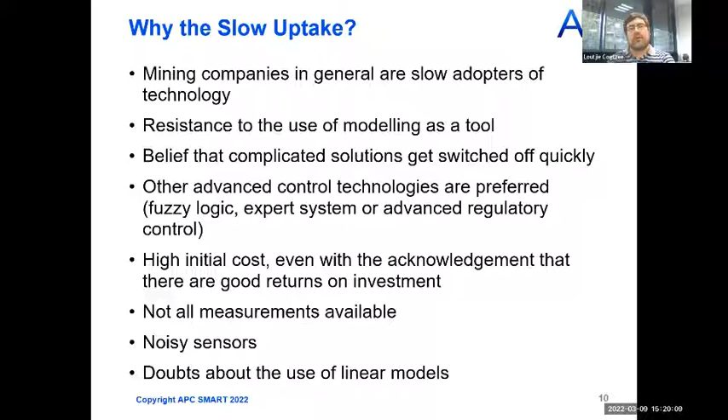Yeah, we are looking at that. Internally at Mintek we're looking at model-based machine learning, where it actually fits a model that you can interrogate, or even using machine learning to update the model of your MPC by tweaking the parameters. So that we do see can be a possibility. The other one can be a model-less optimization technique that we're also looking at, because if the model is too variable due to factors changing that you don't measure, then a model-less type of adaptive control from machine learning is also a possibility. But again, that will most likely run at the optimization phase, not the regulatory phase, just for safety reasons.

So I may have been a bit cynical about AI and ML, but I'm not. I've even got a student looking at reinforcement learning to see what we can do in what's called a distributed MPC problem. So I'm sure it's coming. It may be viable while Loutjie's still doing this stuff, probably not while I'm still doing this stuff. So yeah, I think it's for a next generation.

I think our skepticism comes from people coming from a computer science background, where these things are developed, without domain knowledge, saying 'I just need the data, I don't need any understanding of the process to make this work.' That's where people are going to get burned. Even for MPC, to make it work properly, there's a lot of domain knowledge needed, specifically about the processes we apply it to, and making sure the models are rational. If you just let the auto modeler loose, get any models, and say 'that's good enough' and apply it, you're going to burn yourself, even with MPC. So domain knowledge together with machine learning knowledge, and making sure there's a sufficient way to validate the models, is the important thing. The technology itself, there's nothing wrong with it. You need to make sure it's combined with proper domain knowledge and interrogation and validation.